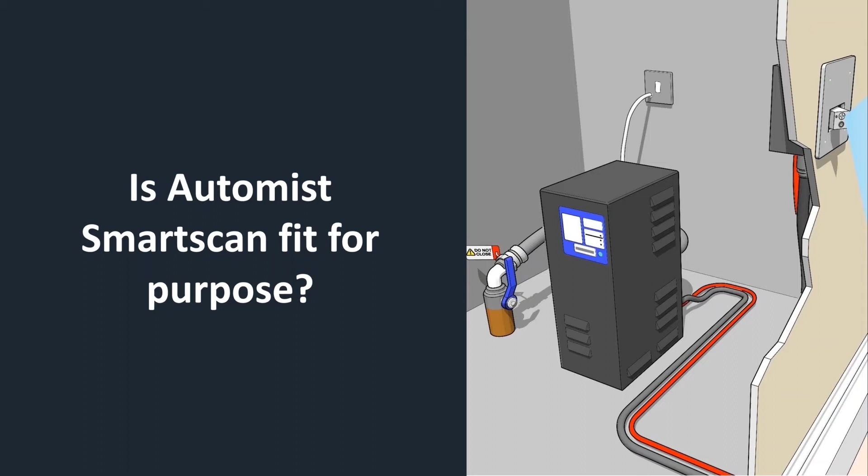So the question is then, is Automist fit for purpose? And this invariably comes to the question of, is it compliant to the standard? Does it meet the standard? And we'll now go into that.

So the first important thing to note is that a standard is the definition of a scope of a product category just as much as it is the definition of, or setting the performance expectation for, that product category. So the usual interpretation of a standard is that it's the only allowable prescriptive way of meeting the building regulations or any other performance requirement required.

And in fact, it isn't. It is a way. It is a well-established, historically established recipe. It doesn't mean that it's the only way. It is just defining that way and how you validate that that way is adequate.

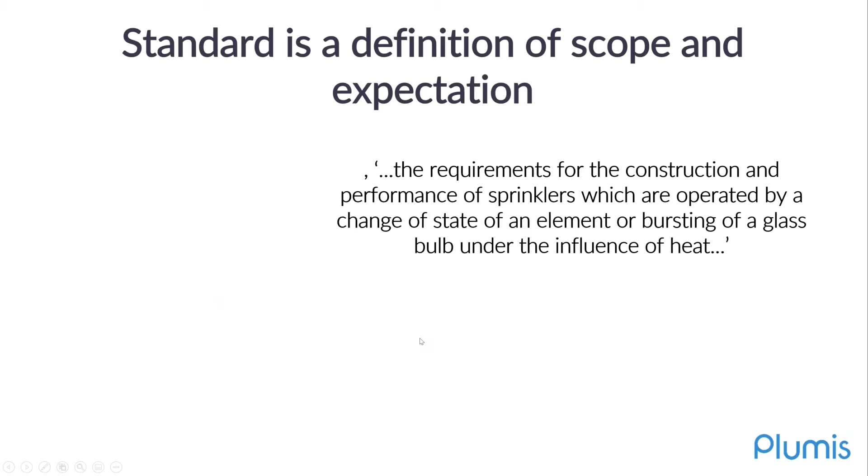So we do have for sprinkler systems BS 9252 as the standard that defines what is a sprinkler system, and it requires it to be a system activated by a bulb, and it then defines what's the performance requirement. So what if you run a fire test? What are the maximum temperatures you're allowed to meet?

So what's important is what are the performance requirements? Like what are you trying to achieve in terms of tenability, and not that you have to be a wet pipe, right? The wet pipe defines what a sprinkler is. Other systems can perform just like a sprinkler and not be a sprinkler and not be within the scope of the standard. So the question is not whether it is compliant with respect to Automist. The question is whether it is within the scope of it.

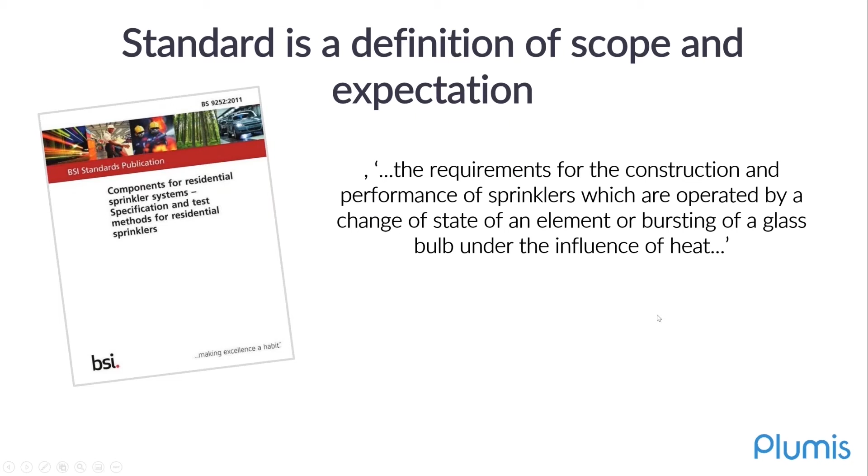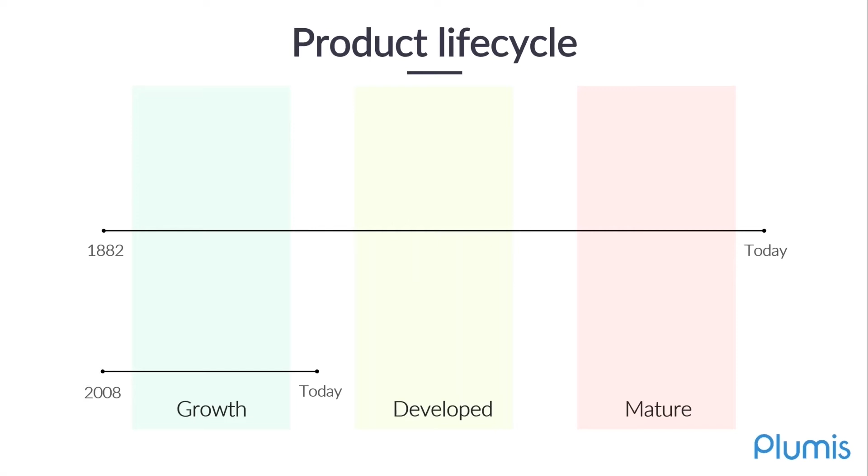And Automist is outside of the scope, but it does perform to the fire test requirements, and we'll get a bit more into that. So why is Automist that different, and why is there a standard, for example, for a sprinkler, but there isn't a standard for Automist itself?

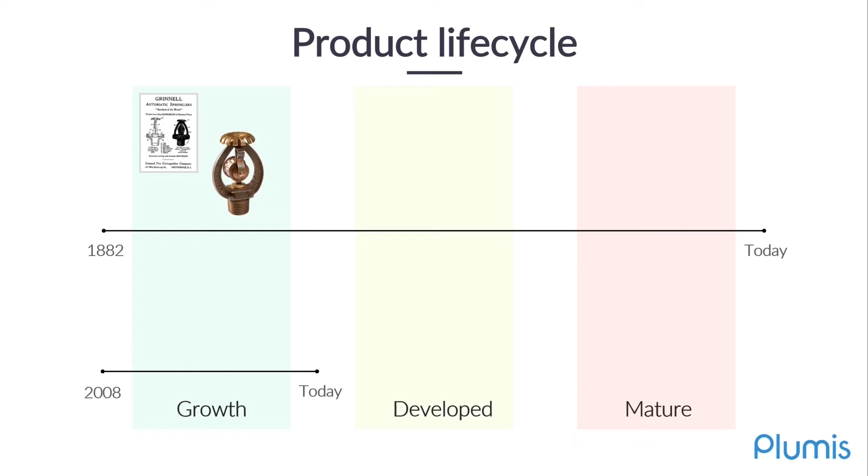So the sprinkler was invented in 1882 by Grinnell, and it was patented then. For 20 or so years, he was the only one that was allowed to manufacture it. There was no standard to it. The only reliance was on third-party testing to validate that, or even specific in situ testing that the application worked for its intended purpose. And its intended purpose has always been for property protection, which is why the large Factory Mutual testing lab / insurer exists and is a major player in the industry today.

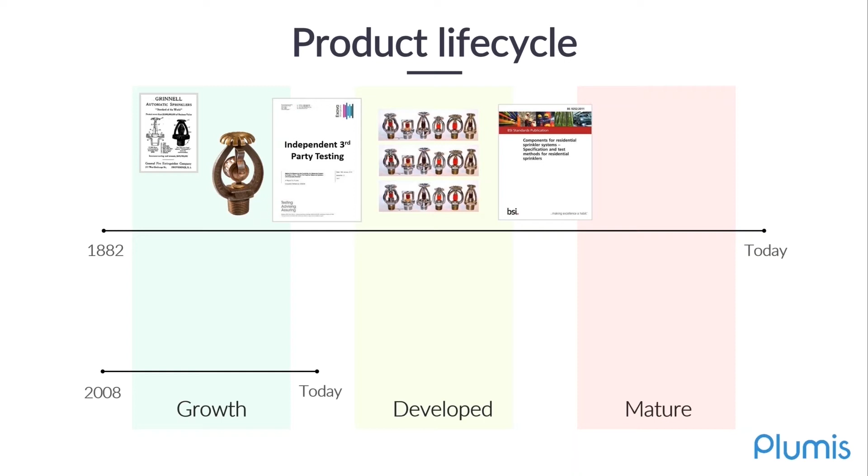So only after the 20 years, once the patent expired, were there several manufacturers making the same sprinkler system, basically copying what Grinnell had patented and developed. And only once there are 3 manufacturers of the same system can a standard be written by BSI. And that's what they did. They wrote a standard for sprinklers. In fact, originally that standard was written in the US, and BSI adopted the same type of standard, or the same methodology of validating the sprinkler.

And nowadays you have at least some 10 large manufacturers, mostly based in the US, for sprinkler systems, and they're basically a commodity. This is a very mature product. Anybody can make it as long as they run the fire tests and certificate the system to demonstrate that it does meet the standard. So the whole objective of a standard is that you're creating a level playing field for a consistent product in the market, so that if a buyer buys a sprinkler, they know that they are buying a sprinkler as opposed to something else that they think is a sprinkler but isn't. So it's setting the definition of what the product is and its expectation.

So where we are today with Automist is the same stage that Grinnell was in 1882. We are in the patent. We have a few patents that protect our product, and we continue developing patents as we improve the product. And it means that nobody else can make our product, which also means that there's no standard available for it.

So what we do instead is that we test against existing standards, or against the fire tests that are present in the existing standards, to demonstrate that our system is just as effective as those defined by those standards. And that's what we have, where we have fire testing that demonstrates that the system performs as intended.

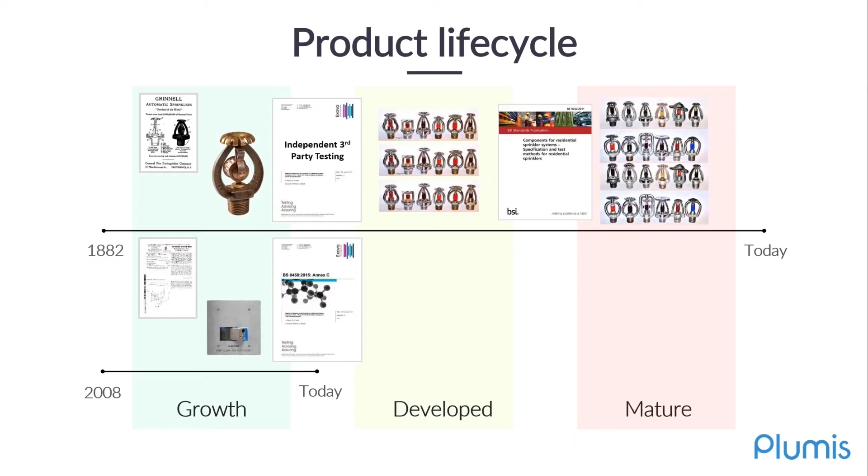I've been involved in standards for many years. I've chaired British standards, I've chaired European standards and chaired ISO standards meetings, and have been thoroughly convinced that sharing opportunities and innovation and materials is a good way to go. I think it's important to understand the life cycle of a product.

In the early life cycle of a new product, it may well be patented to protect it because it's innovative and new and exciting. And later on, as that product becomes further developed, and there is further competition, the patent perhaps expires. It is right where there are similar products to compare it with that standards step in to ensure there is a level playing field alongside those products, that they can be measured and tested at outcomes together.

So the life cycle of the product is important for a buyer to understand at what point they're looking to purchase the product. Buyers must find other ways to assure themselves that the product is fit for purpose in meeting their requirements in the marketplace, and not rely solely on standards as the only solution.

So going back to where the standard is a definition of scope and expectation, the NFCC study in the UK says that the overall efficiency of a sprinkler is 94%, which some might argue is very high, is very good. It is quite good if you compare to the 80% effectiveness of compartmentation and the use of fire doors in domestic settings. But coming originally from the automotive industry, I'd say that this is a very poor effectiveness

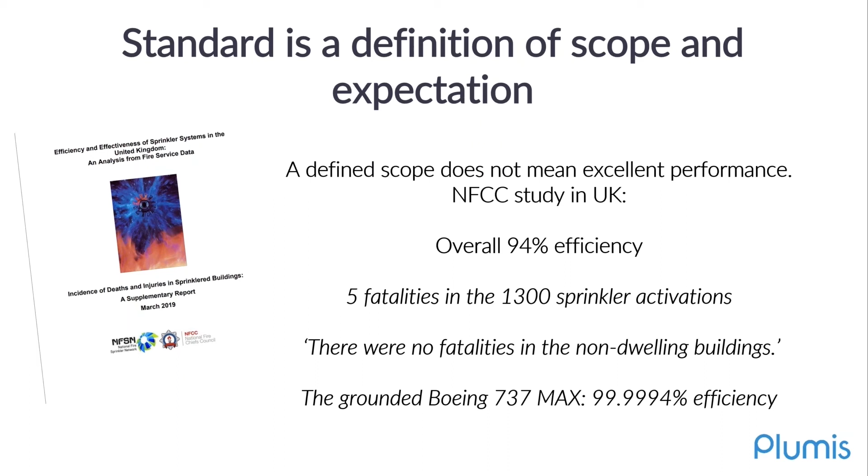We know that sprinklers work very well in property protection, where they're well maintained. The key thing is improving the performance of sprinklers in domestic settings, where, even though the NFCC promotes the use of sprinklers, there still are fatalities. So it is the least worst solution, and yes, it is the dominant and the best solution historically to date, but we do believe that there's the potential to improve it significantly.

So it is one of the things that Dame Hackitt criticized the industry for in her report post Grenfell, suggesting that reliance on a totally prescriptive system discourages ownership and accountability for decisions. So there's just the exercise of checking a box as opposed to finding whether the solution is fit for purpose, is the best solution for that specific occupant, specific type of building, specific use of that building.

So if the question then comes up of, well, is even an innovative system allowed by Approved Document B and all the guidance, given that Approved Document B and BS 9991, for example, state sprinklers and watermist a lot? Well, Approved Document B does state that innovative systems are allowed. The key thing is to determine whether they're fit for purpose. And of course, there might be the additional exercise to validate whether they're fit for purpose.

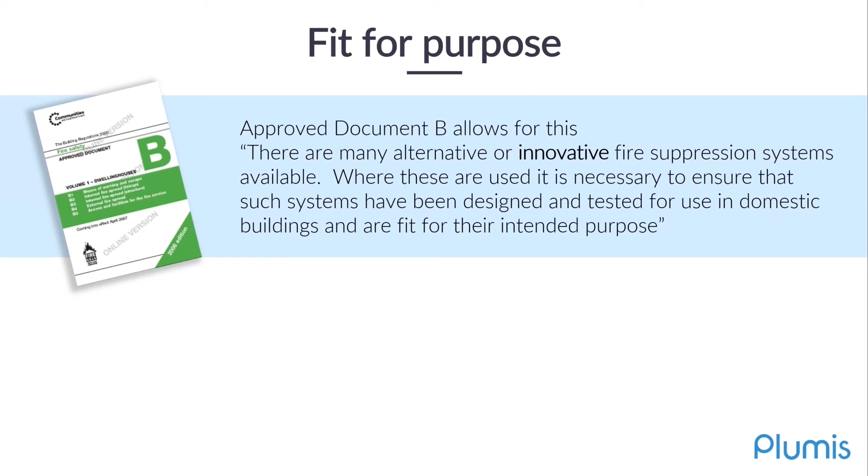But our argument is that if that exercise is done properly, then there's a good chance that a better solution will be found for the occupant and the type of building than what is written today in the prescriptive guidance, given that the prescriptive guidance tends to be only historically based and therefore has difficulty adopting and recommending the use of innovative systems.

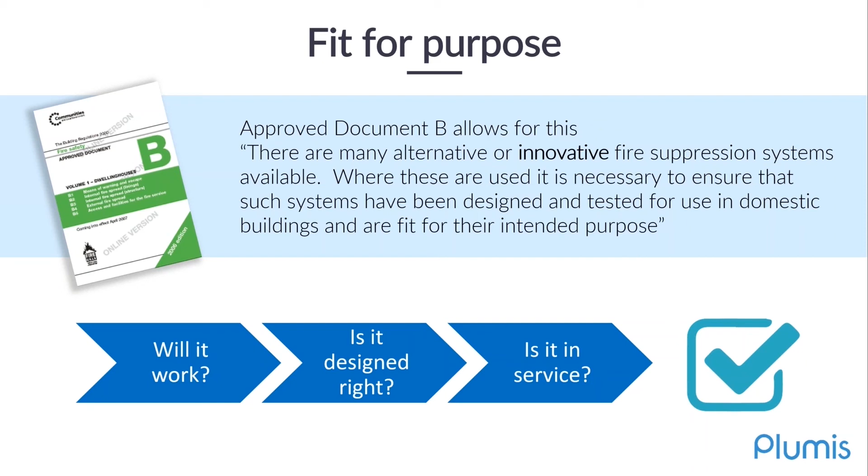So how do we demonstrate that it's fit for purpose then? Well, we use this three-stage approach, which is used by Zurich Insurance, and we like that approach because it's the same logic that we apply to our system. Firstly, questioning whether it will work. Second, whether it's designed right. And third, if it's in service.

So defining whether it will work is what we've done with all the fire testing against the sprinkler standards and against the watermist standards, and demonstrating that it passed all the fire tests to those standards. We went beyond that and we got a registered detail from LABC, where further scrutiny was done also by London Fire Brigade to validate that the system would also be specified correctly, that would avoid obstructions from the head given its height location.

And finally, there's the BSI Verification Certificate, that is a third-party independent verification that indeed the fire test performance was met in all these test reports. Because what we have on the left is only test reports. They could be just saying, well, the system met this temperature, in effect a fail, but it doesn't tell you that. It's the BSI Verification Certificate that instead looks in more detail into the handbook and compares the test reports to the standard to validate, in fact, that it has met that performance requirement.

We're also in the process of getting the system certified. There is no certification today possible in the UK. The BRE, which will be the only UKAS lab for certification of suppression systems, does not yet have a domestic standard LPS published. So there are no domestic and residential watermist systems certified in the UK. And if you're told that it's certified, then that's mis-selling. What there could be is third-party assessed systems, like through the registered detail process through LABC.

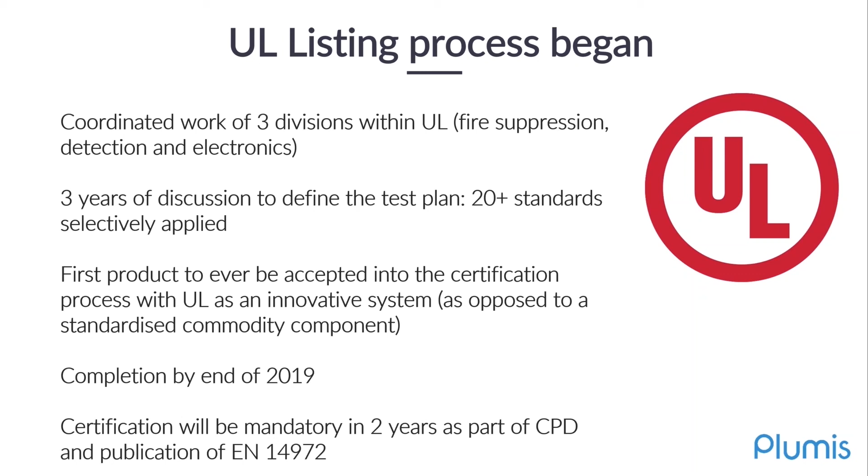And the additional point to make is that in approximately 2 years, we should have the publication of EN 14972, which would supersede BS 8458. And when this EN standard is published and harmonized, that would mean that certification would be mandatory. So this might happen in the next 2 years, in fact.

So is it designed right? Well, a lot of the purpose of a suppression standard is to define how it is correctly specified. Given the Automist is not a wet pipe system fitted onto the ceiling, there is a whole DIOM, so design, installation, operation, and maintenance handbook, that explains how the system should be specified. And we make that as controlled and as frictionless as possible, so that this is properly done by every accredited installer that Plumis retains, audits, and trains.

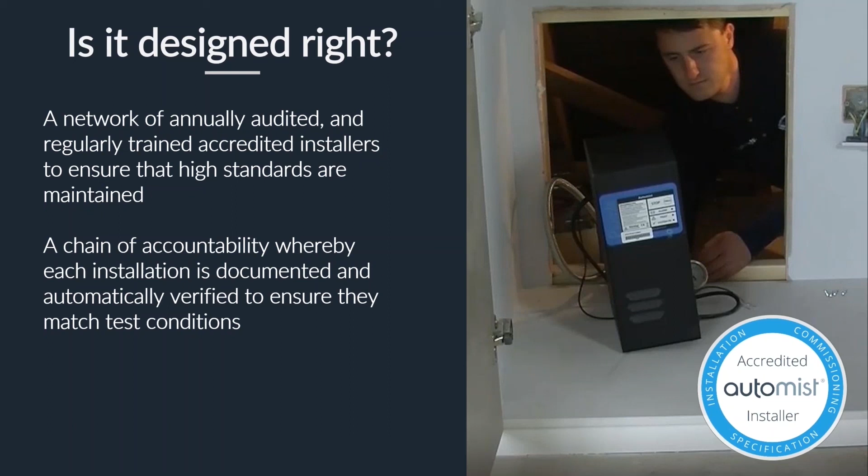And you can see how we do that, for example, by our use of our web-based software tool, which defines the rooms that need protecting, then locates the doors and windows of the room, which are important for the location of our heads, and then defines where the spray heads should be located. And therefore it confirms whether the suppression system is addressing every area within that room so that it is properly covered.

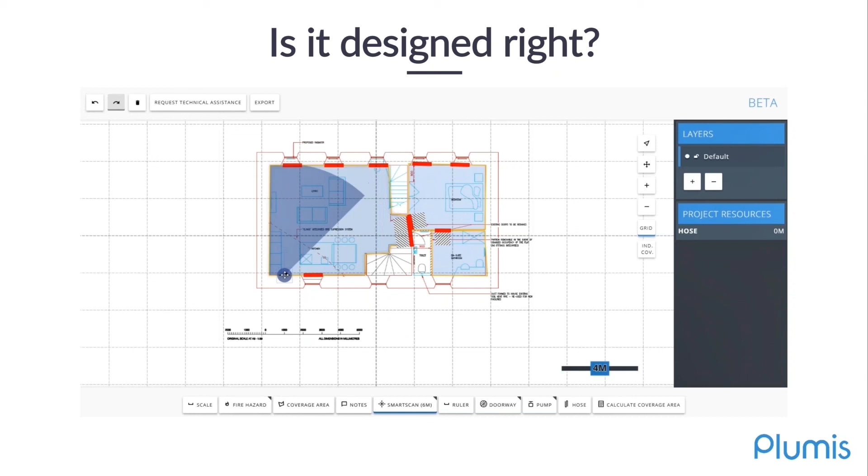So this is a tool that every Automist installer uses, and it simply captures all the rules that were defined as part of the registered detail process and are documented also in our handbook. They're all captured in this tool and automatically applied to tell you, yes, you can in fact place the head in these locations so that they are providing adequate coverage as part of our guidance.

So is it serviced correctly? Well, Automist is the only suppression system whose commissioning process is a full test of the system from the first point of detection until the final point of water discharge. So we do discharge every spray head as part of commissioning in situ once it's been installed to confirm that the system will be working as intended once there is a fire.

And curiously, this is never done by any wet pipe system. The pump is installed, the piping installed, the nozzles are installed, and then the fingers are crossed to hope that it will work as intended. And this is, again, one of the sources of the lower reliability of wet pipe systems. They should ideally be tested to ensure that there isn't a rat in the main pipe feed that would stop the system from working.

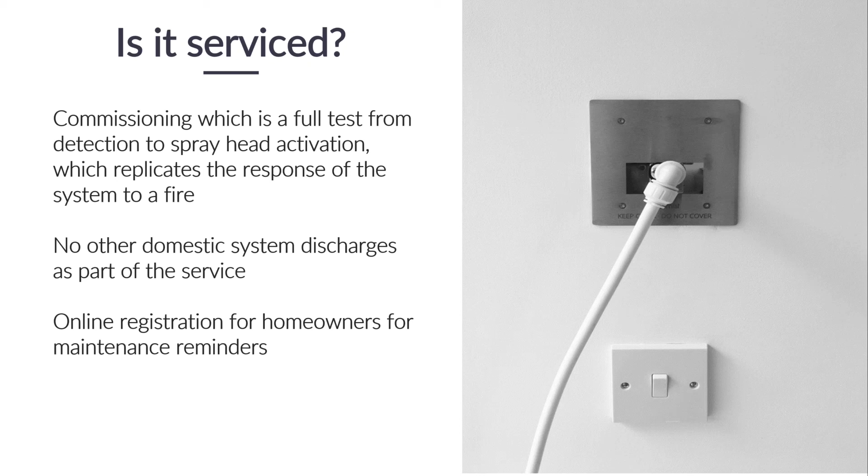And finally, every spray head of ours comes with a label so that the homeowner or the occupant of that property can register the system and understand how it works, given that it's clearly present in the room and visible to the occupant frequently, usually located close to light switches, so it's always telling the occupant that it's there. Once the system is registered, there's an automatic reminder for them to do their yearly service of the system, which we recommend, but it's not mandated.

There's no reason why the system would not work years after it's been installed. Given that it's a dry pipe system, there's no risk of mold building up or the pump getting stuck because it needs to be churned. None of these requirements that are typical to a sprinkler apply to our system. All that's done is a check of whether the system has been tampered with and that it will work as intended.